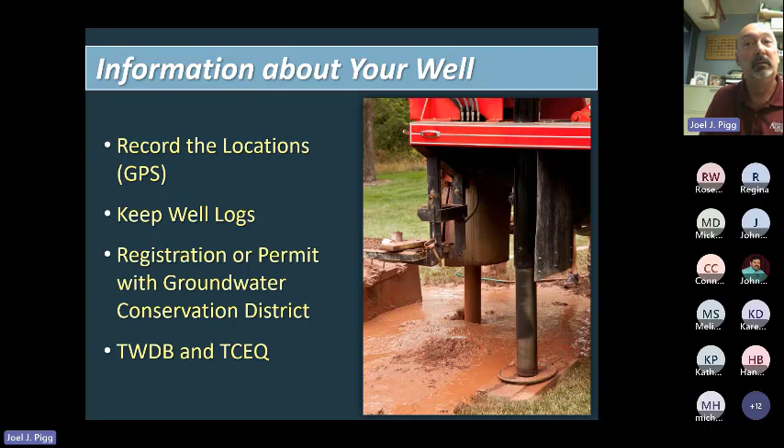Also, if you're a property owner thinking about drilling a water well, I'm going to give you a few hints and things about drilling water wells. We need to make sure that if you're drilling a well, or going to have one drilled, that you contact your local groundwater conservation district. There in Brazoria County, it is the Brazoria County Groundwater Conservation District, and they will give you the paperwork and permission to get that well drilled. So they are very pertinent to getting a well put into your location. The acronyms at the bottom of the page, TWDB (Texas Water Development Board) and TCEQ, are entities across the state that are important, but not so much with what we're going to talk about this evening. So a little bit of information on those in a few minutes, but not a whole lot.

This well yielded 60 gallons per minute. Before I came on with the extension service, I was the general manager for the Real Edwards Conservation Reclamation District, which is the groundwater district in Leakey and Rock Springs. So I can tell you that a well that is 627 feet deep in the hill country and yields 60 gallons per minute is not a common thing in that area.

Typically, wells are drilled there—if you're close to the river, it's probably less than 50 feet. If you're out in the middle of the county, it's usually around 300 to 350 feet. And most wells in that area, well, again, by the river, you may get yields of 50 to 60 gallons per minute because you're using Frio River water or Nueces River water. But out in the middle of the county, 60 gallons per minute is very, very rare. Typically, a well in Real County is going to be 5 to 10 gallons per minute.

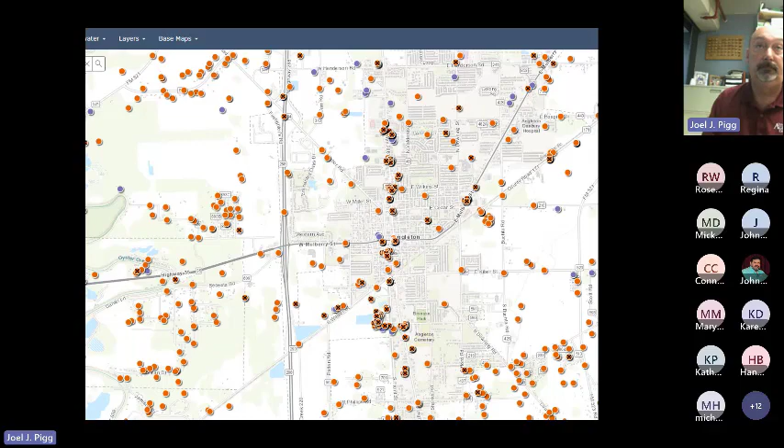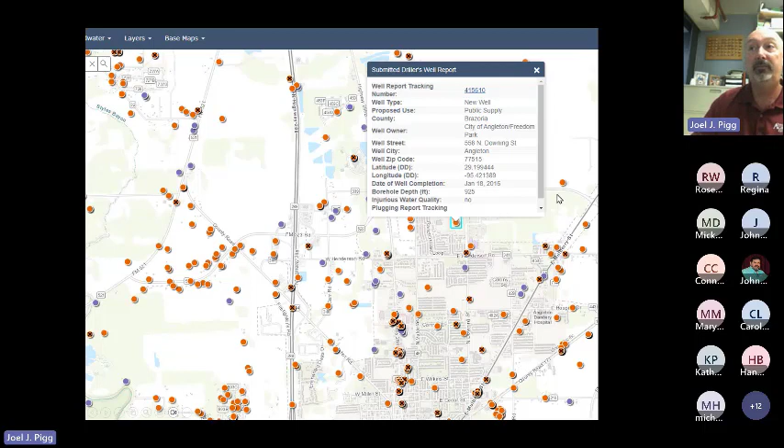So if we find one of these wells, I randomly found one here that says it's a new well, public water supply, Brazoria County, city of Angleton in Freedom Park. It also says this well is 925 feet. If I click on the little blue hyperlink at the top of the page, it brings up a well log. Again, owner is the city of Angleton, and it gives us the longitude and latitude of that well.

It tells us that this well was drilled in January of 2015. Bottom depth of the hole is 780 feet. Pump depth, so the pump is set at 300 feet, which means we've got about 400 to 450 feet of water below the pump.

Folks, if you have a water well, you never want that well or pump to be at the bottom of the hole. You always want a little bit of space to lower the pump. We're all getting more and more neighbors moving into Texas every day, so we want to make sure we have room to lower our pump as water tables go down. East Texas, where y'all are at, does get some drought, but not near what's going on out in El Paso or Pecos, where it really gets dry and they haven't had much rain. So typically your fluctuation in water levels doesn't move very much.

Out west, we do see a lot more variation in water levels.

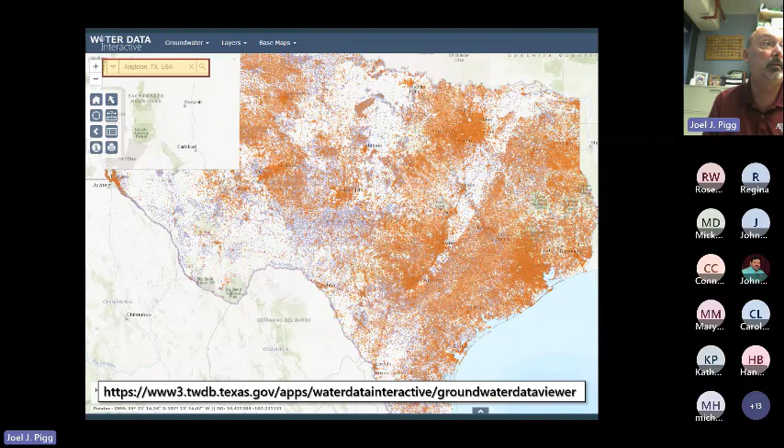You also could reach out to the groundwater district there in Brazoria County and ask those folks that work for the Brazoria County groundwater district if they have a copy of the well log. If they do, they will happily make copies and share with you. Last ditch effort, if none of those things turn out to work for you...

Heather Dotson, who works for Texas Water Development Board, is in charge of the databases for wells across the state. So if it's not on the map that I showed you, the groundwater district doesn't have it, the driller won't take time to look for it, this may be an alternative. She has some databases that are not necessarily on the map, but she may have some information to be able to get it for you.

So talk bad about drillers for just a second. Drillers are really, really good at drilling water wells. Can y'all guess what a water well driller is really, really bad at? If you guess paperwork, you guessed correctly. They love to go out and drill holes and drill wells, but they hate to do the paperwork that's associated with it. They know that they're required to do it, they know they have to do it, it's just not their favorite thing. So it has to be a good rainy day, a good rainy week before they sit in the office and do paperwork. Otherwise, they're out in the field drilling those holes.

Okay, so if you're thinking about getting a well drilled, I'm going to recommend that you get a licensed well driller to put that hole in the ground. Just because your best friend's brother-in-law owns a drilling rig and he's in Louisiana and comes over here all the time to visit, doesn't mean he may be the best person. He may be a great driller, but I'm going to say, if you have a well drilled in Texas, you want a licensed person to drill that.

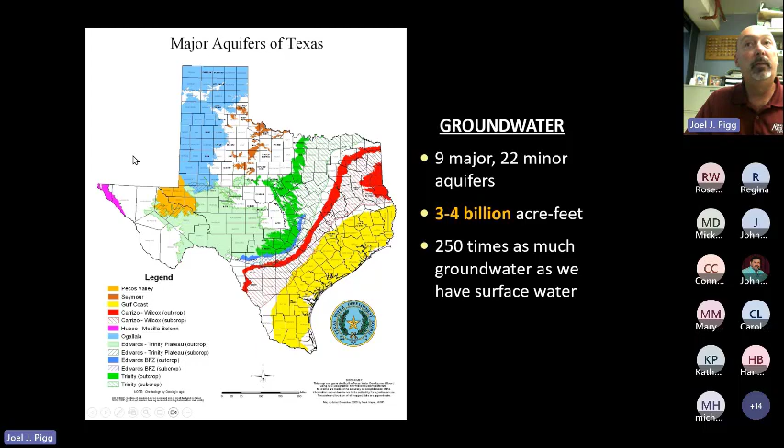They estimate there's 250 times as much groundwater as surface water. Living in East Texas where y'all are at, there's a lot of surface water. So if there's 250 times as much groundwater under the state as what y'all have over there, we've got a lot of water to use up. Now keep in mind, not all of it is good water - some may be saline, unpotable because of saltwater intrusion. But there is a lot of groundwater, and in some areas they will use water that's not great because that's the only water they have.

The Environmental Protection Agency has set regulations for drinking water standards. Now, as a private water well owner, no one is going to come on your property - EPA rules don't apply. Texas Commission on Environmental Quality is not going to come to your farm, your ranch, your house and say you have to make your water meet this standard before you can drink it. Now, any city supply, any MUD or SUD or municipality, they are subject to drinking water regulations that EPA sets, and TCEQ is the state entity that makes sure that is regulated and those rules are followed.

The Federal Safe Drinking Water Act of 1974 established the standards for surface and groundwater sources used for public water supplies. EPA sets standards based on whether a contaminant harms human health, is known to occur in drinking water, and can be detected in drinking water. So TCEQ is that enforcement arm of the EPA for drinking water.

Public water systems are set to those standards for health reasons and for nuisance reasons. These can also be a guide, but again, no one's going to come onto your property and make sure that you are following this, that your well is in compliance. It's just a set of rules and regulations that we would like you to follow for your own health and safety.

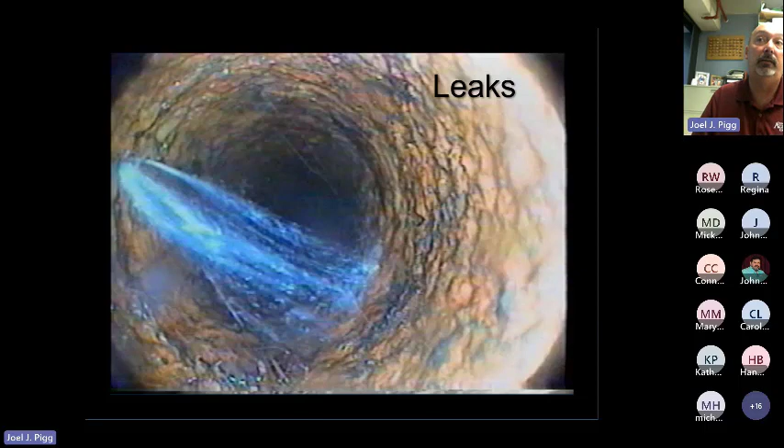Okay, another picture of some leaks. As you can tell, this looks like a cased hole. Ever wondered what the inside of a piece of PVC looks like? Looks pretty much like the outside, except when you're looking at a well, every 20 feet you get to see that nice purple ring where you cemented them together.

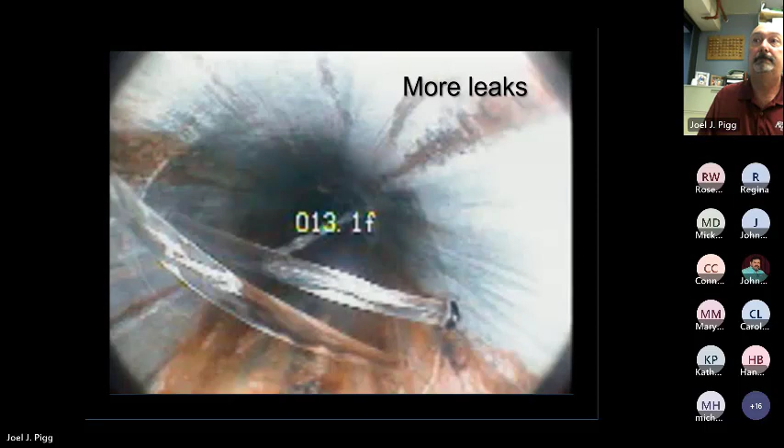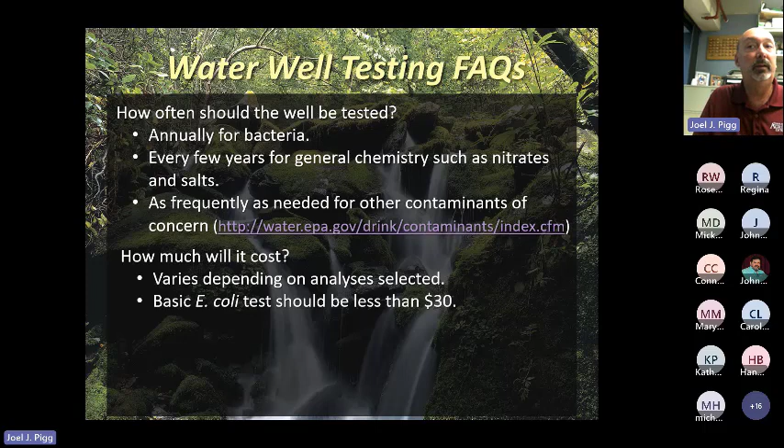Getting a water test for E. coli should be less than $30—a lot of health labs can do that. The program I've got travels around the state of Texas, so we're not in Brazoria County regularly, but we try to get out and around. If we come in, it's about $15 for us to run the test. We look at E. coli, coliform bacteria, nitrates, TDS. In certain locations across Texas we have arsenic issues within the aquifers, so we test for that too. But less than $30 to get an E. coli test at a local health lab—around Harris County and Fort Bend County, there are several labs in that area that can do those tests for you.

For drinking water testing, here's a website with the Texas Commission on Environmental Quality's list of drinking water labs. The problem with their list is it's just alphabetical, and other states are included in it. But it's a good set of certified labs across the state of Texas where you can get those water samples tested.

If you want your water tested for general chemistry, I'd recommend sending a sample to the Soil, Water, and Forage Testing Lab here on campus at A&M. Many of you, if you're master naturalists or master gardeners, know what that lab does for soil samples—they also do water samples. They don't test for bacteria, but they will test for other things: calcium, magnesium, potassium, boron, hardness, conductivity, pH, iron, zinc, copper, and more.

So for general chemistry, if you're growing a garden and your soil's tested fine but the garden still isn't doing what you'd like, one thing you may do is send a water sample to the lab to make sure your water isn't too salty for the plants you're trying to grow, or to explore other options. If it's not the soil, it could be a water issue. So if you're having problems, I'd recommend sending a sample to the water lab here on campus.

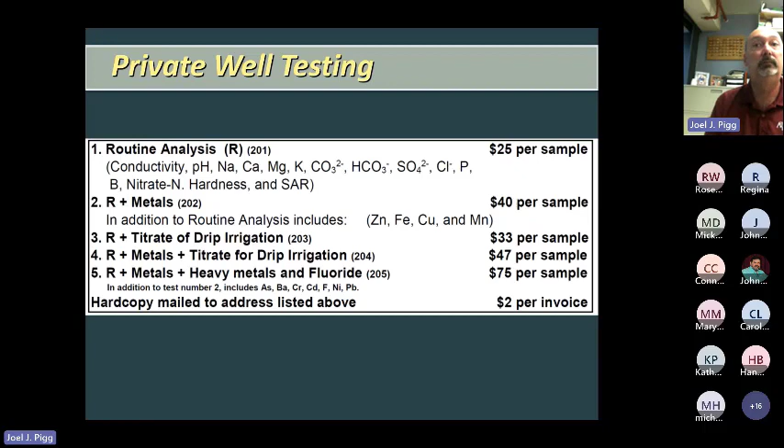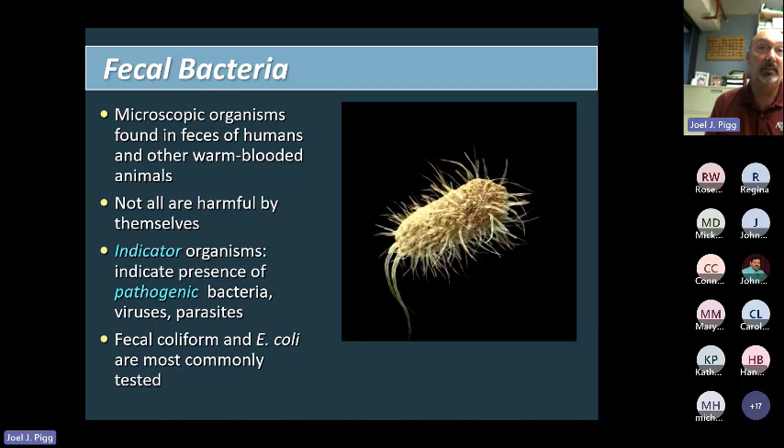The way we would get in there with some of your shallower type wells, when you get the hurricanes, when you get things going on and the water tables are disturbed and water lines get broke, this is how this little guy gets in there. Fecal coliform, E. coli are very simple tests for us to do. We have a mobile lab that we come out and set up our testing whenever we come to y'all's areas or to any area across the state.

The other thing that we would like to make you think about a little bit is if you're on a private water well, chances are you are on a private septic system as well. So we want to make sure that you inspect the septic system annually, make sure everything is going.

So here's another thought question for you. On your piece of property, I know y'all are pretty flat out there, don't have a whole lot of rolling hills, no mountains, but if you've got a little bit of slope to your property, would you prefer to have your water well or your septic tank on the high part of your property? And would you want the septic or water well? Which one would you want on the high spot? Which one would you want on the low spot?

We all know everything flows downhill across Brazoria County. Everything flows from Fort Bend County through Brazoria County to the Gulf. So everything flows kind of in that southeast direction, flowing downhill. So you always want the well on the highest point of the property. You want the septic downhill. And again, if I was going to drill in Brazoria County, I would want my septic kind of southeast of where my well is at. So if we do have an issue, everything flows away from my well and we don't have contamination issues.

If you've got that septic system, we want to make sure that you pump it out every 3 to 5 years or as needed. If you're just a single couple living there, you may be able to go 7 to 8 to 10 years. If you've got a family of 5 or 6 or 7, you may have to do it every 2 to 3 years. So just depending on how much you're inputting into the septic, we need to make sure we are alert and aware of what's going on and that the septic is functioning properly and as recommended.

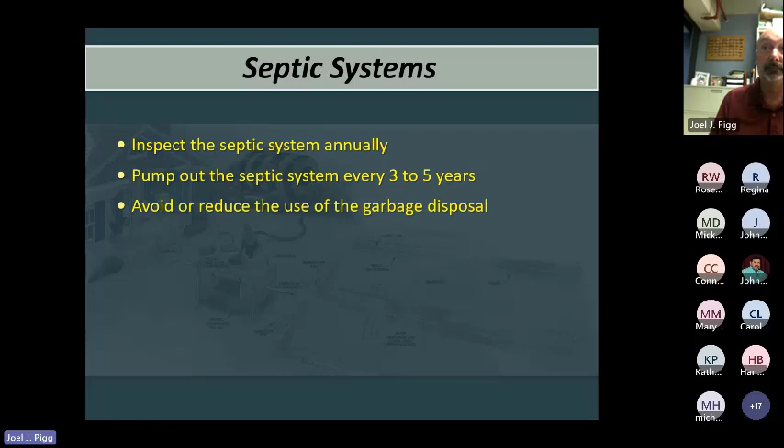Reduce or avoid the use of the garbage disposal. Don't put everything down the garbage disposal for your septic. It kind of throws the microbes and the balance out of that septic. So it's not always a good thing to use a garbage disposal when you've got a septic system.

Whenever we do our TWON program, Texas Well Owner Network, we have 2 different kinds of programs. I've got a 1-hour program and I've got a 4-hour program. In the 4-hour program, we actually have a septic expert that comes with us. We talk an hour on the kind of information we're talking about now. We talk an hour on septic systems and what needs to happen with those. We talk water quality issues and water treatment issues.

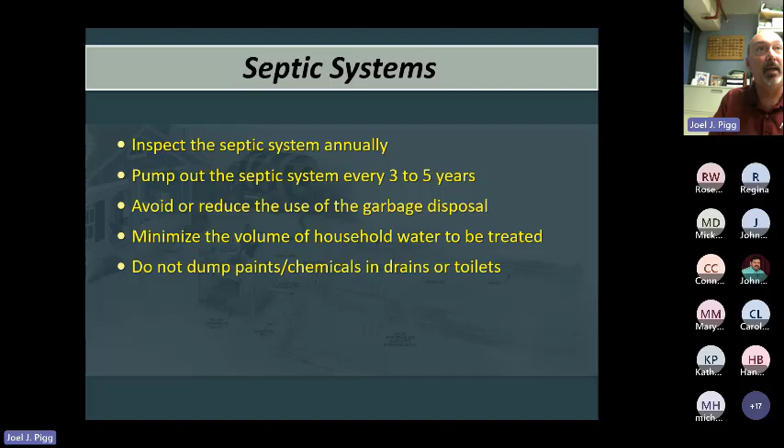So our septic expert says, whenever you've got that septic tank, don't use a lot of volume of water that's going to have to go through and be treated in your septic. By that, he means don't use 1 day a week as the only laundry day and pump in 10 loads of laundry on Saturday. All that water flushes into your septic. Hopefully you've got a gray line that goes from the washing machine out into the yard or something, but don't get all the water going into your septic because that much fresh water, gray water, really throws the balance of a septic off. The main point of a septic is for the wastewater to be treated and then it goes through the system.

Don't pump paints and chemicals down the toilet. Our septic guy always says your homework after this program is to go home, use the restroom, and that feeds your septic everything it needs. He's heard of all kinds of additives you can add to a septic, but he says those really don't do a whole lot of good. If you see a label that says septic safe, that does not necessarily mean it helps your septic system. It means it can be flushed down a 3-inch sewer pipe and will flow through it. Just because it says septic safe does not mean it's feeding or helping the microbes within your system. It just goes down the line.

Protect that drain field from damage. Remember the drain field is there for a reason. It does not need to be under the driveway or the sidewalk. It's there for leaching purposes so your septic tank does not overfill. It's not the parking lot, and it really doesn't need to be the water supply underneath your garden. So protect that thing and try not to do crazy stuff with it.

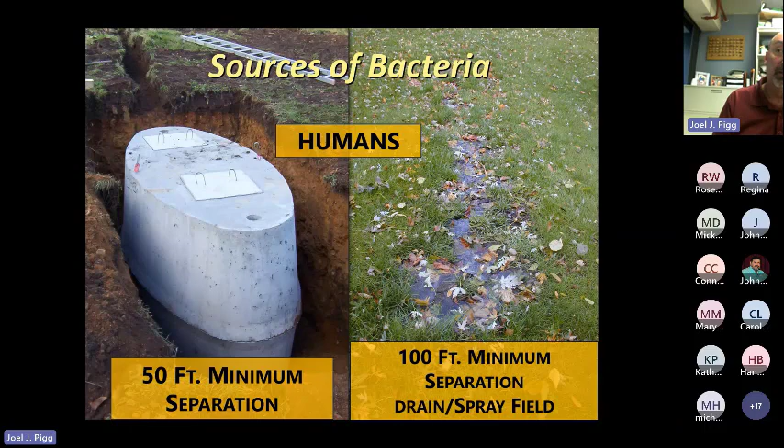Separation from your water well and your septic tank is a minimum of 50 feet, and we want to be 100 feet from our water well and the drain or spray field of the septic. Sources of bacteria: humans are the number one source. Again, we want 50 feet separation from our water well to our septic tank. We do not want the picture on the right, where we've got water pooling up, possibly coming from septic. Not a good situation to have. 100 feet off the well for the drain or spray field.

Livestock can also be an issue. We want to make sure livestock is a minimum of 150 feet away from our well, downslope from the well. Common sense tells us everything needs to be downhill on the property from our water well.

Here's another thing I didn't think of earlier. When you get a water well drilled on your property, you get to choose where that well is. When a well driller comes in, he's going to want to pull the rig in, find the easiest place to drill a hole, put it in, and be gone. Whatever you're paying for it, $30,000 or $40,000 to have a well drilled, you get to choose the location. So if he says it should be right in the middle of the property, but that's where your wife wants to build the new house when y'all move out there, don't let him drill the well there. Put the well wherever you want it and be able to put the house where your wife wants it. Always be smart, guys, and do the right thing.

Another good source of bacteria: we love them, but our domestic animals produce lots of feces, and they can contaminate our wells if they're too close, especially in some of our shallower well fields, probably close to the coast. We want a minimum of 150 feet separation from pens, yards, and runs to keep our domestic pets away from that water well.

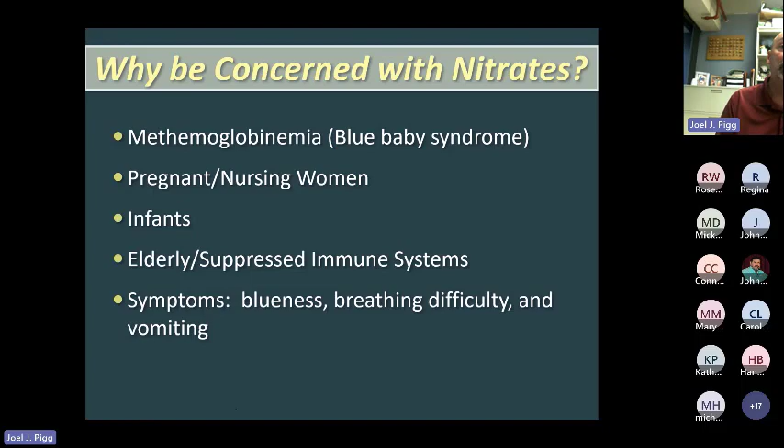So there are cures for it, but we need to know we've got the problem to be able to fix it. Sources of nitrates: it could be coming out of our septic if we don't have an airtight, enclosed system, or if there's a breach in a water line, we could be having nitrate issues. Same thing: 50 feet from our septic, 100 feet from our drain field. Fertilizer is also one of the major issues that cause nitrate levels. We want to make sure we're 150 feet away from those fields with our well, our drinking water. Now, we understand that if you've got center pivots or irrigation systems, that's not always feasible, but that's typically not going to be our primary drinking water supply—that's our cropping system, our irrigation system.

Okay, animal waste we need to stay away from, 150 feet separation for pets and livestock. Wildlife had no guidelines. I would think in Brazoria County you may have a little bit of a wildlife issue, maybe a wild hog or two running through that county. So no guidelines, but we want to make sure those wild hogs cannot get close to our wellhead and contaminate it. We know how much damage they can do, so try to keep them as far away from our well as possible.

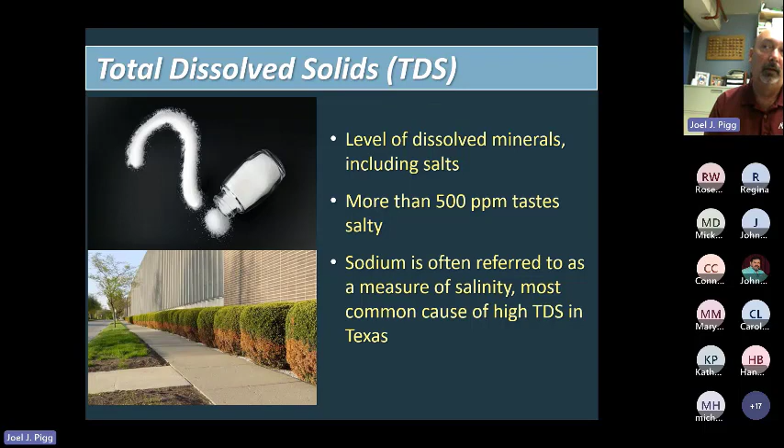Okay, TDS, or total dissolved solids, is basically the level of dissolved minerals, including salts, found within our water. More than 500 parts per million, the water begins to taste salty to us as humans. Sodium is often referred to as a measure of salinity, the most common cause of high TDS in Texas. Y'all are in the Gulf Coast aquifer, which is susceptible to some salinity issues, so your water may be in that 500 range. Here in College Station, we are right there at 500, so new people that come into the community don't like our water very much. They say it does taste salty to them.

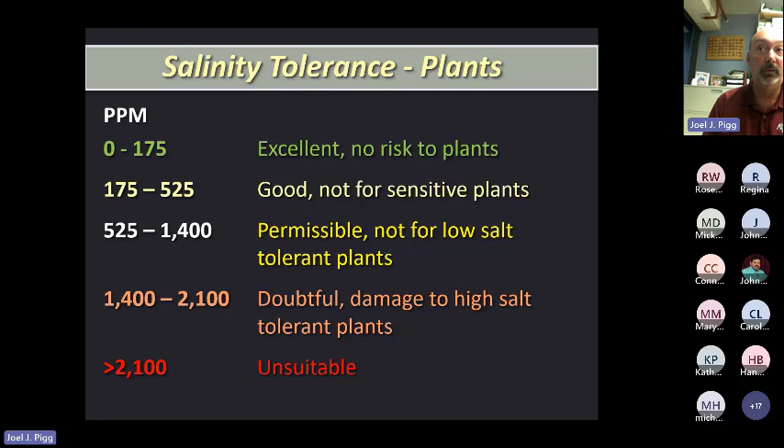So the salinity tolerance for plants: 0 to 175 parts per million is excellent, no risk to plants. If you get into that 175 to 525 range, sensitive plants don't like it. By sensitive, we're talking about some of the vegetable crops - tomatoes don't like salinity, that would be a major one. So anything over 1400 to 2100, tolerant plants are not going to do well. That could explain a lot about what's going on with your garden.

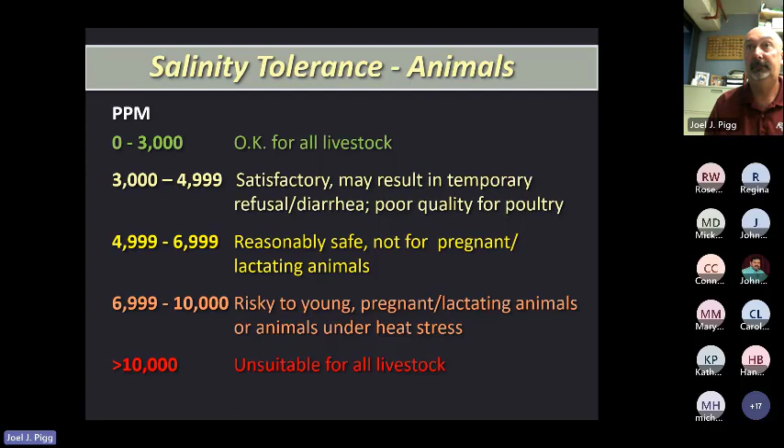Now, some of these people are going to be guys and gals that work at the water supply, or the septic places, or the sewer system there for the county or for the city. So they may not be guys that are trying to sell water treatment devices to you, but they could be.

Okay, so remember, if you have water treatment issues you want to resolve and you call - hopefully this crowd knows the Culligan man - if you call the Culligan man to come out and look at your water and try to take the salt out of it, remember they are trying to sell you a product. You may need that product, but they're going to try to sell you the Cadillac version and not the Volkswagen version, and you may need somewhere in the middle of that. So always be very diligent about what they talk you into and what you purchase, because they are salesmen that could try to sell more than what you really need for your system.

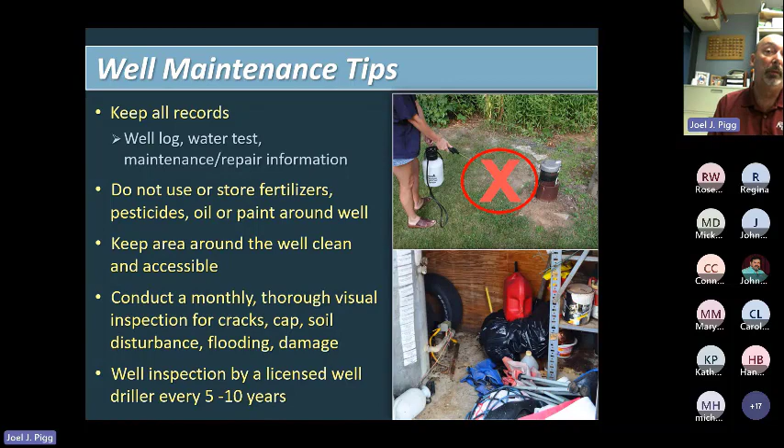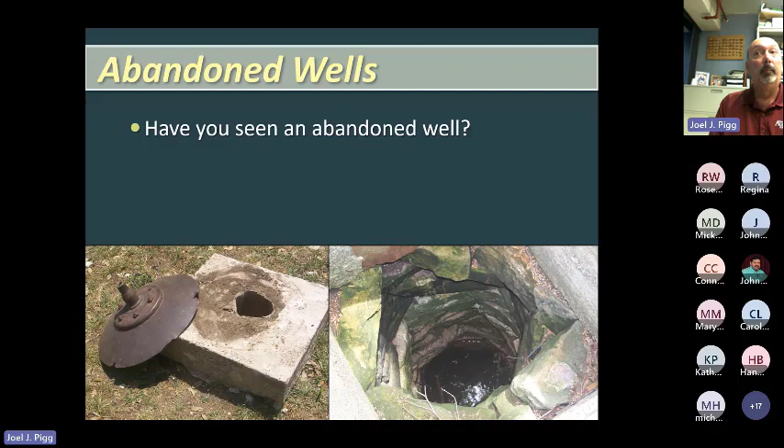I would think in Brazoria County there are probably a few abandoned wells. If you see those, we need to make sure that we address that. If you've got them on your property, you are liable for any injury or aquifer damage that is done. So we want to make sure those wells are capped or plugged.

Should a well be plugged or capped? A well that has not been in use should be plugged. However, if the well is not deteriorated, has good casing, and the pump and column are still good, you may want to cap that well. If you've got a well that still has water in it and the casing is still good, you never want to plug it - put a cap on it instead, because at some point the well you're using today may go bad, and if you've got one already drilled there, you save yourself a fortune by not having to drill a new well. So capping is always a great thing. If it's a dry hole, definitely we want to plug, we don't want to cap.

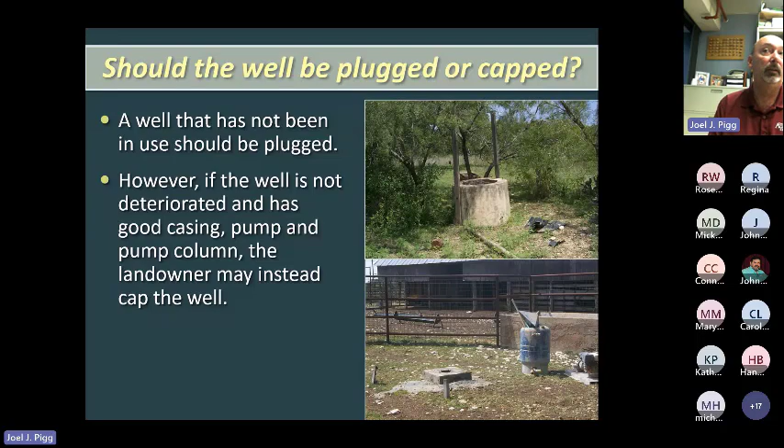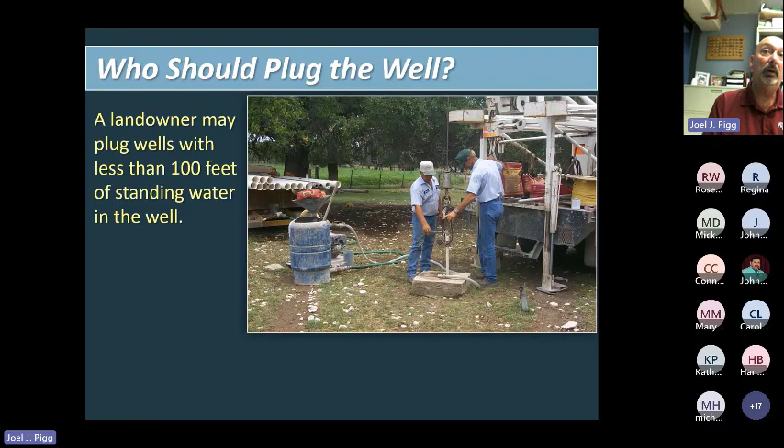Who should plug the well? Well drillers or pump installers can do that job. However, a landowner may plug a well with less than 100 feet of standing water within that well, but the contractor will have better equipment and understanding of the geology that affects how that well should be plugged. So we can do that, but we may not plug it all the way from the bottom of the hole up to the top because we don't have the equipment to pump the concrete or the bentonite down. So pump installers and well drillers do a much more thorough job than what we can as an individual.

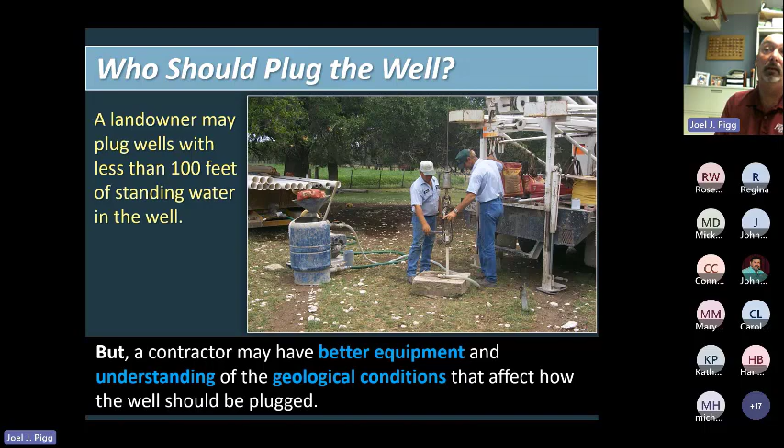We also need to make sure if we do plug a well, we file a plugging report with the Groundwater Conservation District, and we file a plugging report with the Texas Department of Licensing and Regulation. Those are state regulations.